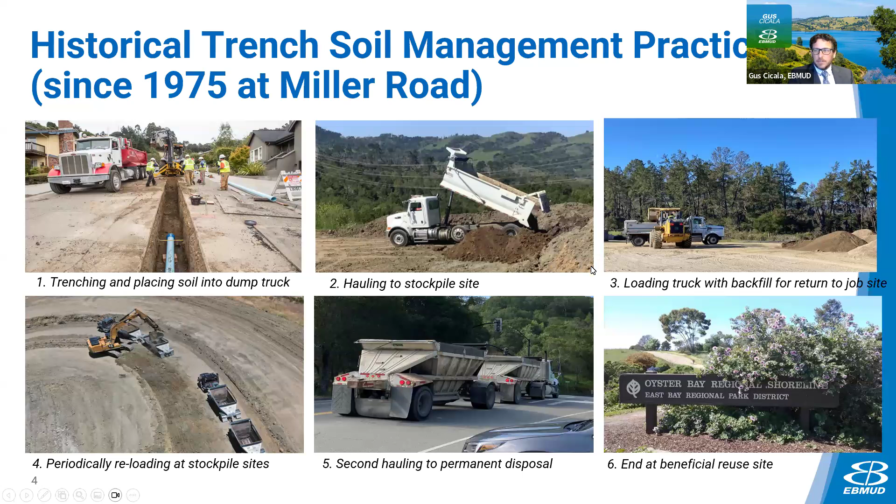Presented here are 3 alternative trench soil management practices that we've been pursuing. First, we've piloted native slurry backfill, where we treat the soil that we remove from the trench and then reuse the amended soil in the trench as backfill. We also continue to explore ways to expand our use of trenchless technology to reduce the amount of soil generated. This includes technologies such as cured-in-place pipe for pipeline rehabilitation.

The primary alternative approach that we've been implementing is called direct haul, where excavated soil is taken directly from the pipeline project to a beneficial reuse site. This avoids the need to double handle that soil and reduces the size and frequency of off-haul events, lowering costs, lowering emissions from trucking, and any potential impacts to communities.

Can you hold on a second, Gus? Can everybody see the slides?

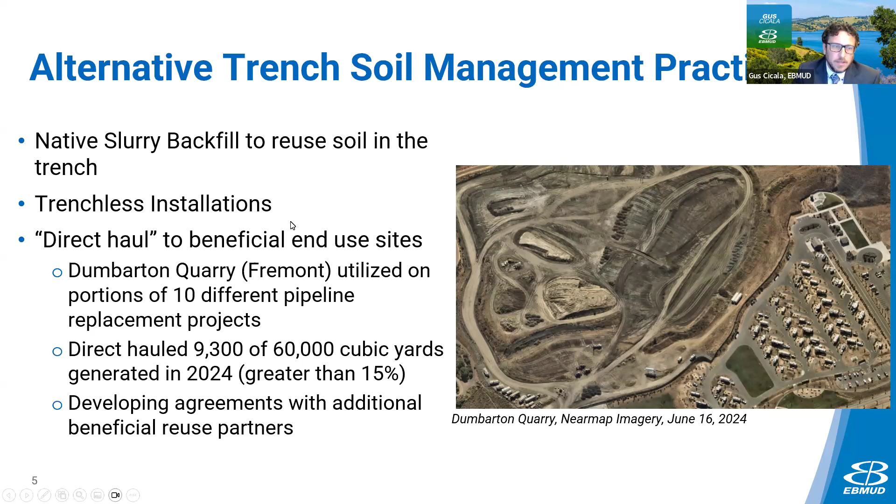One such project where we transferred soil from the Miller Road stockpile for beneficial end use was the Redwood Road landslide repair project. Redwood Road had been closed since January 2023 due to several landslides. East Bay MUD reached out to Alameda County to see if they needed soil for their landslide repair.

County staff indicated they did need soil and were planning to truck it in from their stockpile site all the way out in Livermore. East Bay MUD worked with county staff on an agreement to transfer soil from the district's Miller Road stockpile site, which is less than 2 miles from the landslide repair. We provided the county with our soil testing data, and the county performed additional geotechnical testing of the stockpiled soil, determining that our soil would meet their needs.

East Bay MUD's contractor loaded the haul trucks for the county's repair contractor between September 27th and October 18th last year. In the image on the top left, you can see the landslide as it was in October 2023, and on the right, the repaired section of road as of last month, or February, two months ago now. The bottom photo shows the county's two haul trucks being loaded by East Bay MUD's contractor.

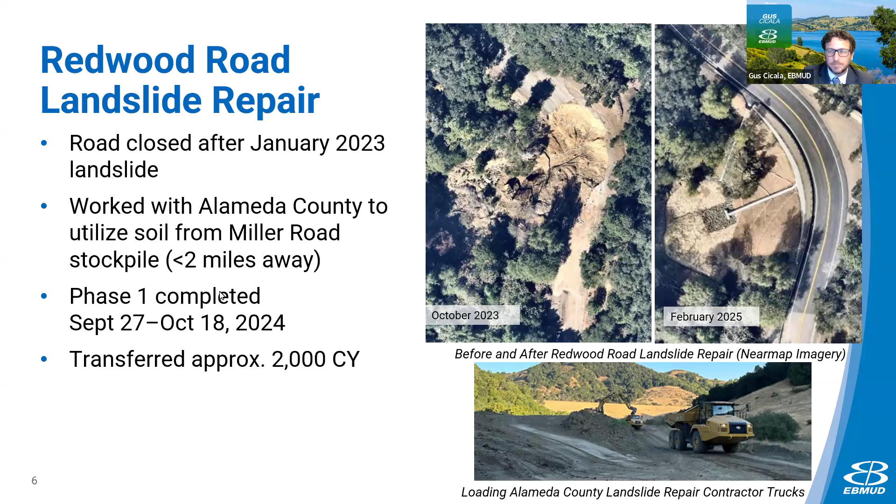The project was beneficial for the county, the district, and residents, saving about 400 truckloads of soil going through Castro Valley by eliminating the county's import and the future district off-haul of that soil. A very successful collaboration there.

Now we'll turn our attention more specifically to the Miller Road stockpile. The map on the left shows where the stockpile is situated, north of Interstate 580 and Castro Valley. The map on the right shows a zoomed-in aerial of the stockpile sites along Miller Road. Trucks generally travel from Interstate 580, then north on Redwood Road to access the site. They drop trench soil at the stockpile site at the north end of the figures, and as trucks travel out, they stop at the rock and sand stockpile to pick up material to head back to the job site and backfill the pipeline trench.

In addition to district trucks accessing the site, vendor trucks are required to stage the backfill, the rock and the sand. And there are periodic removal events of trench soil as the stockpile site nears capacity.

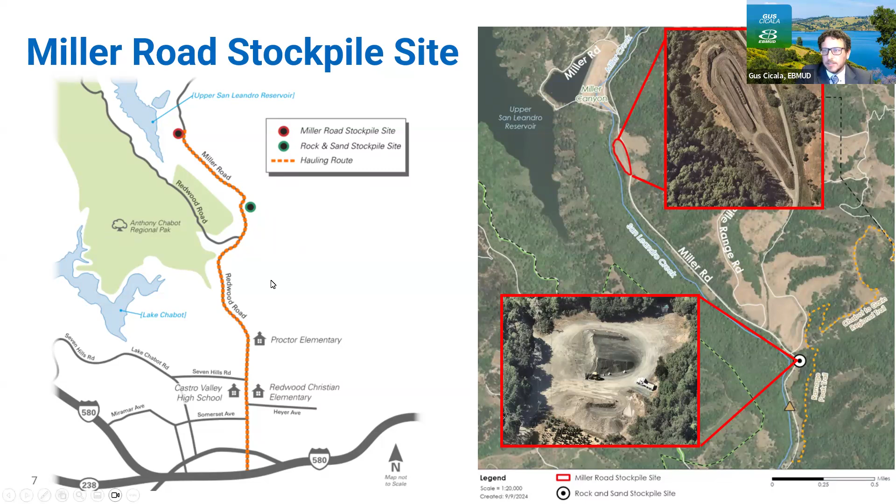Since then, we've improved our approach to off-haul events and developed a much stronger contract with our off-haul contractor. There have been two off-hauls from the Briones site in Orinda, in 2022 and 2024, where we worked under the new off-haul contract requirements, dramatically reduced the trucking hours, and provided more oversight of the trucking operations.

These off-hauls were about 4 times larger than the maximum off-haul we're proposing for Miller Road, and we were able to complete these off-hauls with minimal impacts to the city of Orinda, and they were very successful.

We had planned another off-haul event for Miller Road in 2023, but during the outreach process for that off-haul, the project was effectively put on hold when Alameda County informed us that we would need a conditional use permit, or CUP, to continue operating the stockpile site, since the site is zoned as agricultural.

The CUP process requires that a CEQA, California Environmental Quality Act, environmental review be completed. So in March of 2024, the East Bay MUD board authorized a professional services agreement for the CEQA work.

Since March of last year, we've been working with Panorama Environmental, who is with us here on the call tonight, to conduct the initial study to determine any potential environmental impacts of the project. This led to development of the draft mitigated negative declaration, MND, based on the determination that any potential environmental impacts could be mitigated to a less than significant level.

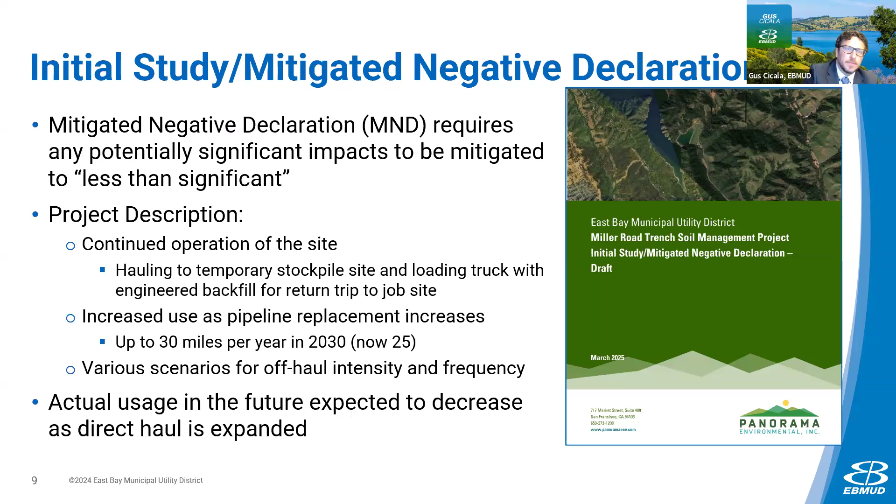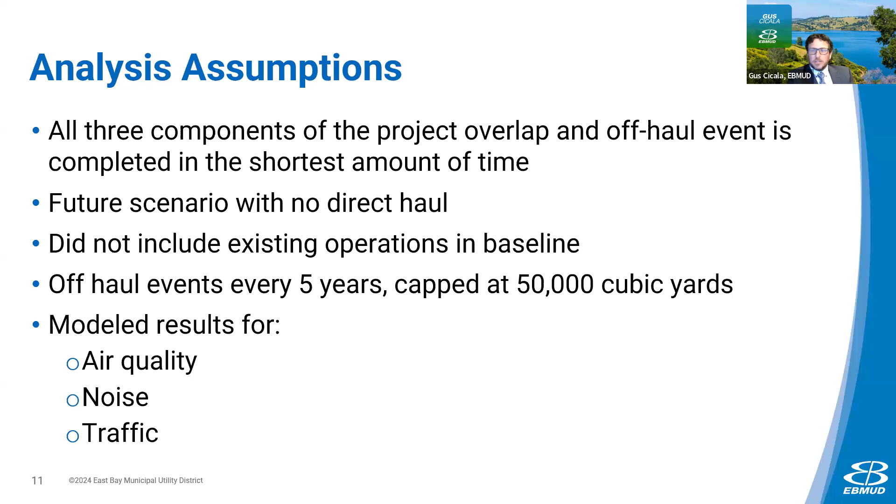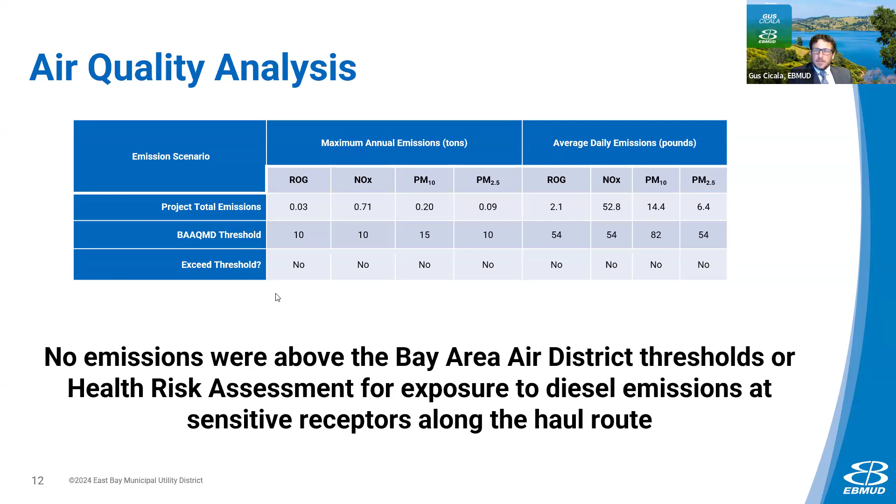Next, I'll briefly touch on the noise analysis. Again, this is with the same worst case assumptions of everything happening at once and with an increase in use of the site. For the noise analysis, we modeled the existing and future scenarios for four points along the off-haul route on Redwood Road, as shown in the table. A threshold of 3 A-weighted decibels was used because increases are considered barely perceptible according to the Caltrans technical noise supplement. Again, the project did not exceed the 3 decibel scenario at any of the four points modeled along the haul route, and there's much more detail in the written MND.

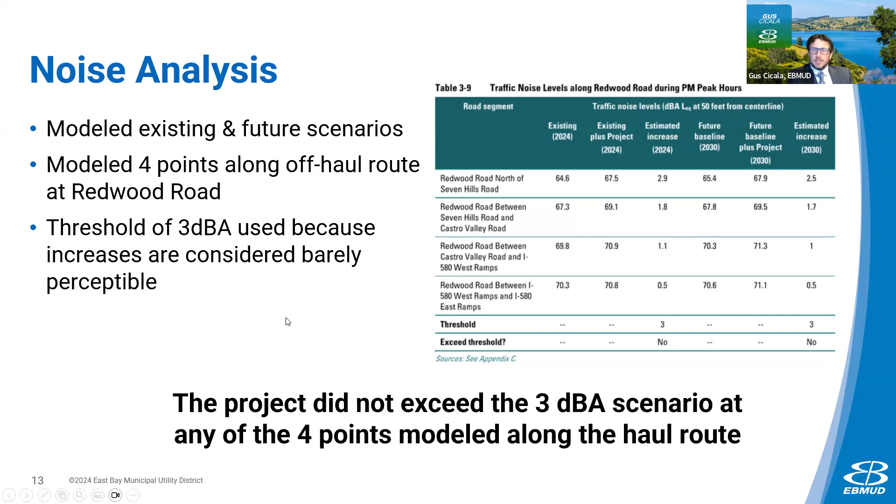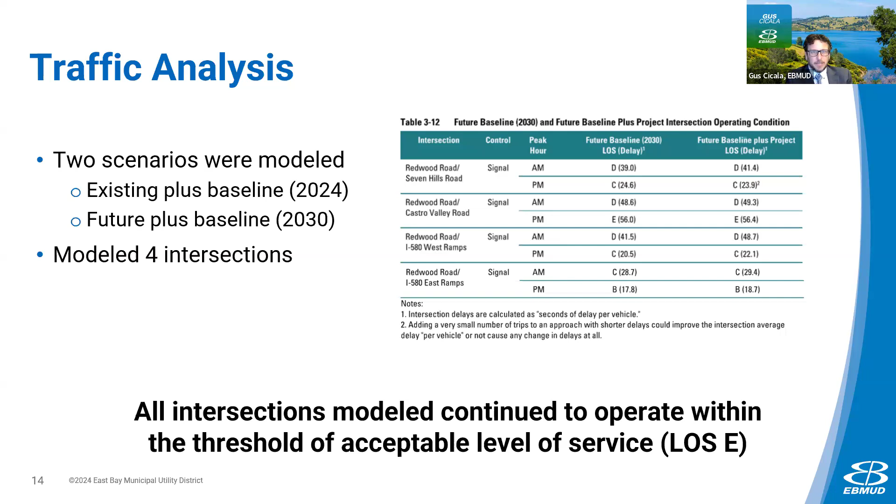The final factor I'll review in more detail is traffic. Again, this assumes the worst case scenario of increased use of the site and all project components occurring simultaneously. We did not include the existing operations in the baseline in order to be conservative. Two scenarios were modeled: the existing plus baseline of 2024, and the future plus baseline, future being 2030, when we expect to have greater pipeline replacements. We modeled four intersections along Redwood Road at 580 East and West ramps, at Castro Valley Road, and at Seven Hills Road. All intersections modeled continue to operate at a level of service of at least E, which is the acceptable threshold according to the Castro Valley area plan of the Alameda County General Plan.

There's much more detail about that in the MND, and detail about all these environmental factors that were analyzed. Basically, all of these were found to be either no impact or less than significant, and two of the factors require mitigation to bring them to a less than significant level. Specifically, the mitigations lessen the potential impacts to the transportation system and associated emergency response in the case of a wildfire.

These are the mitigation measures that the MND recommends be employed to minimize the impacts of heavy truck traffic during off-haul events. These mitigations enhance safety through driver awareness, enforcement, and communication, by giving written safety requirements to all truck drivers, installing radar feedback signs along Redwood Road, and conducting roadway surveys before and after the off-hauls to assess and repair any damage along the haul route. By employing these mitigation measures and coordinating with emergency services, we minimize any potential significant impacts to the transportation system from this project.

These are all listed out in the MMRP, in the appendix of the MND.

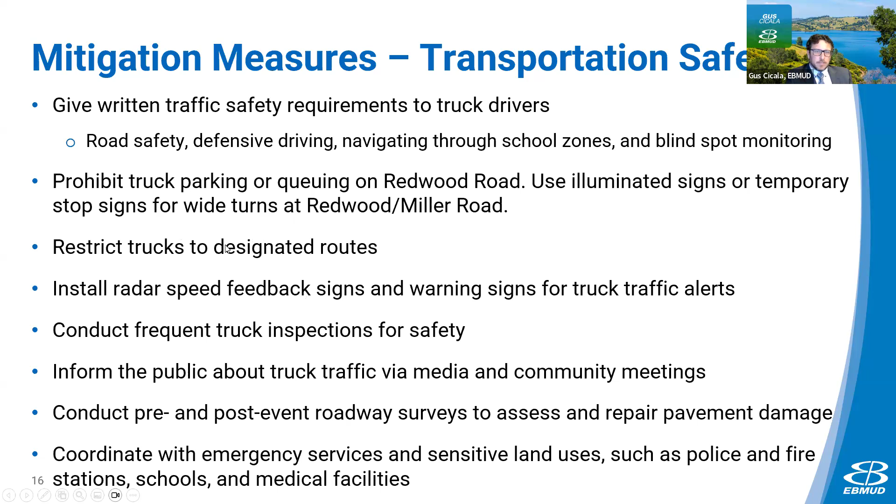In addition to the mitigation measures identified in the MND, I want to emphasize that we are incorporating other lessons learned from previous off-hauls to reduce the impacts to the community. Specifically, this includes more extensive community outreach before an off-haul, reducing off-haul hours as previously described, ensuring East Bay MUD has an on-site presence using construction inspectors during the off-haul, and dust control measures including street sweeping and vacuuming at least weekly during off-haul events, and more if needed. We always adhere to our stormwater pollution prevention plan with proper BMPs and reporting. We performed very successful off-hauls of a larger scale from Briones through Orinda in 2022 and 2024 using these lessons learned. The photos at the right are actual implementation photos from the Briones off-haul in 2024, including some of the extensive inspection documentation that we kept on a daily basis during the off-hauls.

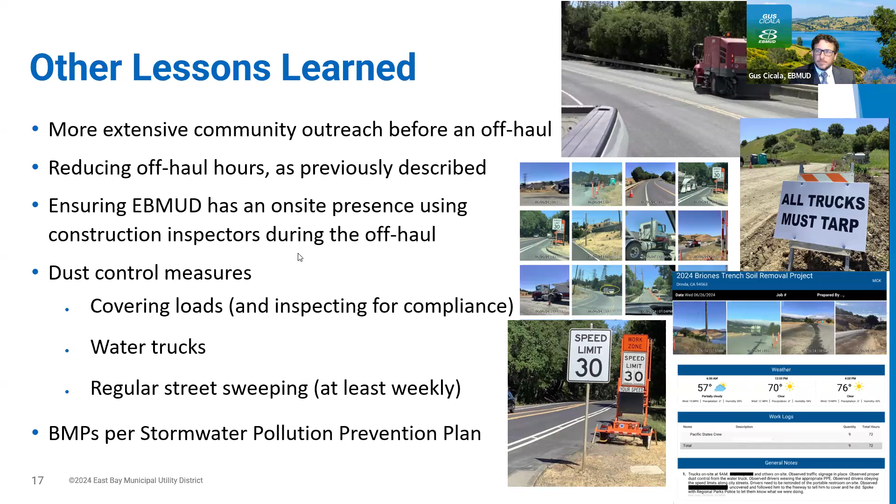The draft MND is currently in the public review period. We will be accepting written comments through May 19th, 2025. We actually extended that. It was a 30-day review period, but that's now a 60-day review period ending on May 19th. You can mail written comments per the instructions on ebmud.com/Miller Road.

Or by emailing miller.road@ebmud.com. After the public review period ends, we will spend the next few months preparing the final MND and response to comments document, and plan to bring the final MND to East Bay MUD's board for consideration on August 12th of this year. Upon adoption of the final MND, we apply for the full conditional use permit with Alameda County.

In addition to being able to view the full MND at ebmud.com/Miller Road, there's also a hard copy available for review at the Castro Valley Library. The draft should be available for review now, and when we get to the final MND and response to comments, that should also be available at the Castro Valley Library in hard copy, and again at our website, ebmud.com/Miller Road. That website will also contain any other project updates that may happen as the project moves forward, so be sure to bookmark that one.

So with that, thank you for your attention. I'll now take any questions.